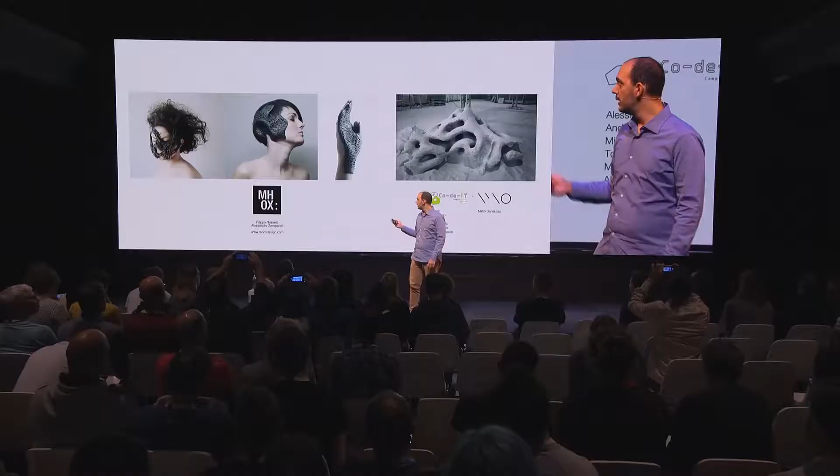I studied building engineering and architecture, but as you can see, my work is not really architectural. This is because I started to experiment in many different directions in order to explore the opportunities of computational design, digital tools, and programming, in order to combine it with 3D printing technology and explore new territories for product development, fashion product, and medical devices.

I think that for a computational designer, there are many reasons for moving to and start using Blender, at least as an additional tool together with other tools they usually use. One reason is, of course, mesh modeling. Blender is really good for mesh modeling. Compared to other CAD software, it can be really fast and really flexible. You have a very powerful creative suite at your disposal.

Modifiers allow you to create a non-destructive workflow. Usually a computational designer is really lazy, so they try to find an easy solution in order to achieve maximum complexity. With modifiers, you can keep your starting model really simple and then add all the rules you want to use and make something really complex out of that.

Another reason is vertex groups. In architecture, medical devices, fashion, everywhere, it's interesting to have the possibility to modulate some effect according to a weight map—having information that allows you to calibrate the effect of what you're doing, for example, with modifiers.

Another reason to use Blender is Tissue. Tissue is an add-on that I started to develop for Blender. Initially it was just a bunch of scripts that I developed in order to move as much of my workflow to Blender as possible.

I needed some features that weren't in Blender at that time, so I said, OK, I can do that, and I can share it with the community so maybe other people can do the same. In the end, we have a tool that works fine for computational design as well.

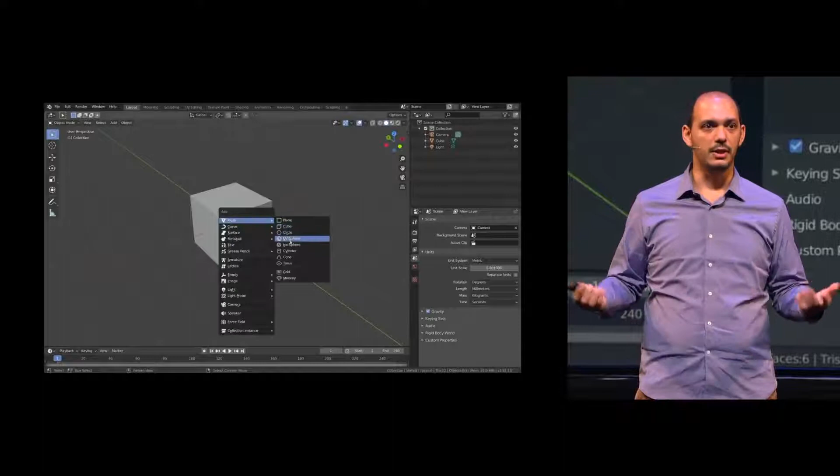Probably the most complex feature, the one that took the most time to develop, is tessellation. This is a simple example of how it works—you can literally open Blender and do these steps using Tissue. You select one object, then another, and it basically creates a copy of the first object for every face of the second one, adapting to changes in size. You have the freedom to change the source object and get an updated result.

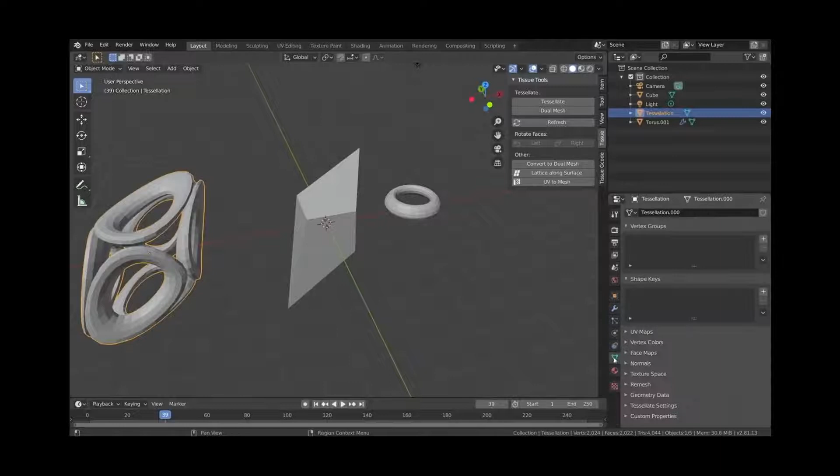It's important to work with a non-destructive workflow—I don't want to redo things again and again, and I don't want to do them manually. Since I'm really lazy, I always try to find ways to make things simple: just a few clicks, focus on the different pieces, and then assemble them when I'm ready to go further.

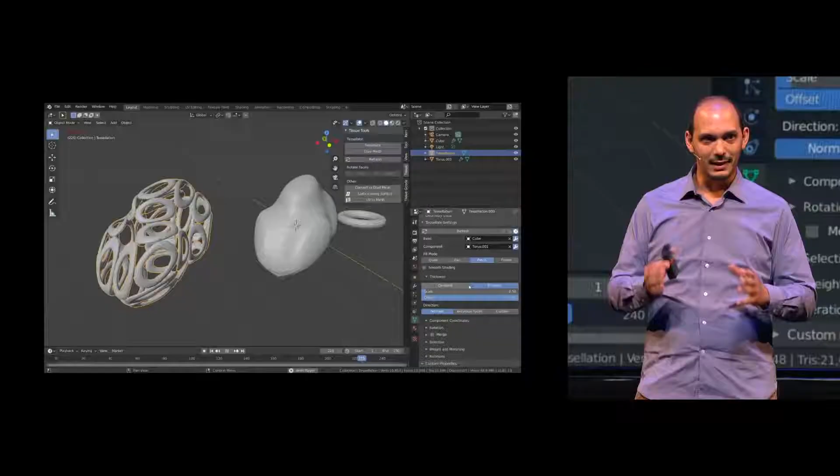There's also the possibility to animate. You can animate the source object and get an animated tessellation, or animate the parameters that control the tessellation. Unfortunately, for animation there's still some bugs that need to be fixed, but if you use the render or viewport animation in Eevee, you can still do animation using tessellation.

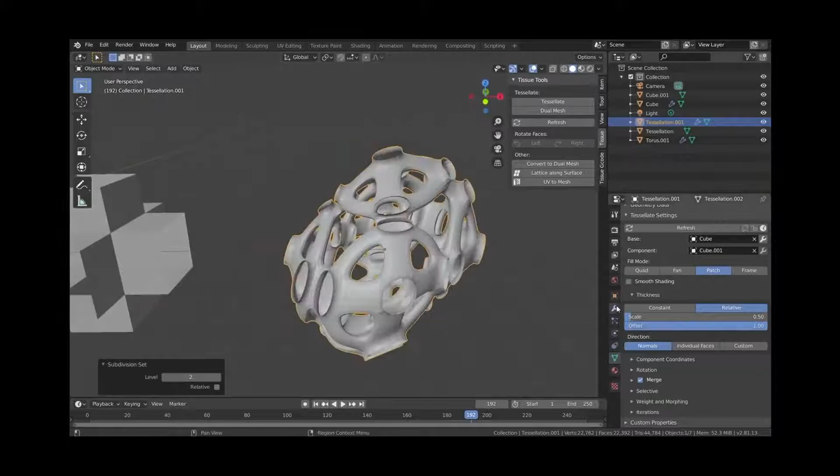For instance, with 3D printing, you usually need a very nice continuous surface. So if your component allows connectivity with neighboring components, you can create one manifold surface with some solidify modifiers and get a 3D printable object. Usually doing that in other software takes a lot of time.

And you have some settings at the beginning. If you just press OK, you can still change those settings in the object data panel. So you have a bunch of settings that you can use to control all the parameters for the tessellation. And according to the type of mesh that you have, you can use different strategies.

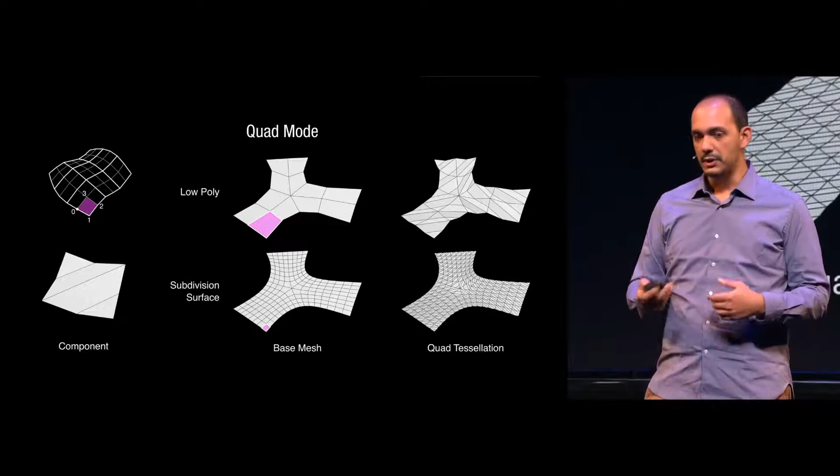The simple one, the one that you can find also easily in other software, for example, is the quad mode. It considers just the face and adapts the component to that face. But sometimes you want to make a smoother component, you want to take advantage of a subdivision surface in order to make them follow nicely the surface. So using patch mode, you can do that.

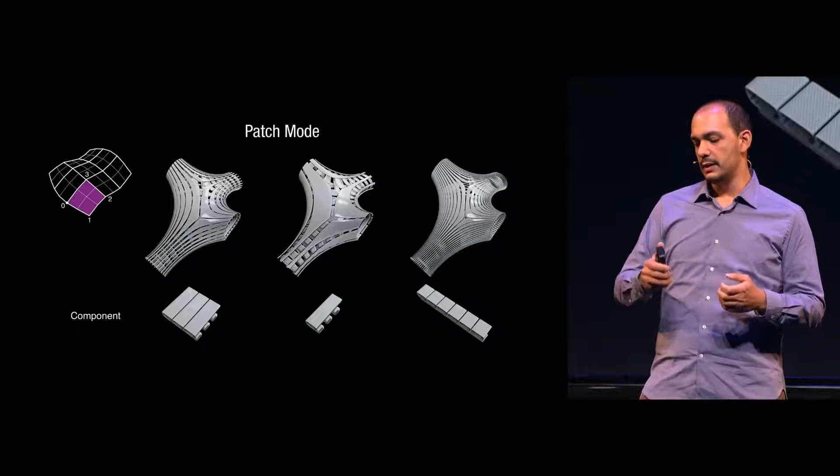So it will keep the topology before the subdivision surface or the last multi-resolution modifier. And it keeps that for defining the size of a component. Then you add a subdivision surface, and this information is used not for increasing the number of components, but for making them smoother and following the surface.

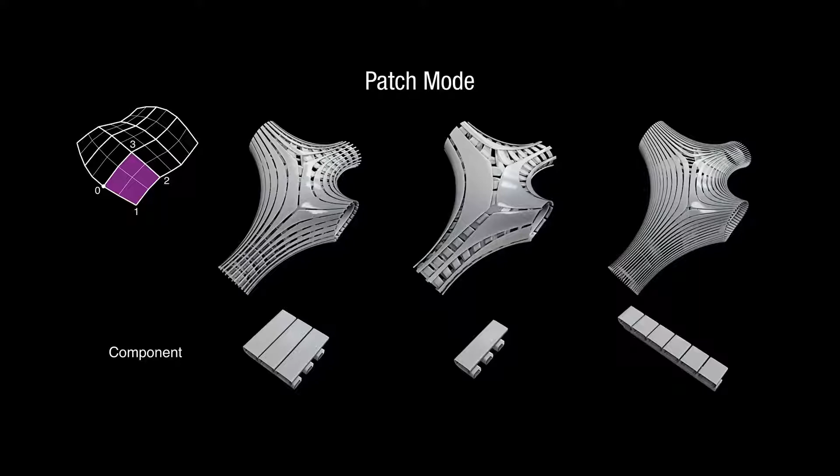And in this way, for example, you can see how you can change the number of repetitions inside the component in order to have different patterns on the surface. So the component is the same, just with some arrays in order to increase the multiplication, and that's it.

But it's more tricky to create a rule to adapt a component to a generic polygon. If you have just 4 sides, it's easy, just remapping the thing. But if you have a generic polygon, I started to think about the most simple way to do that. And what I came up with was to use like a poke faces on each polygon, and then adapt the component to each individual triangle. And doing that, you can achieve very complex geometry using very simple components.

And at some point, it's tricky to understand what you have to do in order to achieve a certain effect, but it's also interesting to be surprised by what comes out just from very simple geometries.

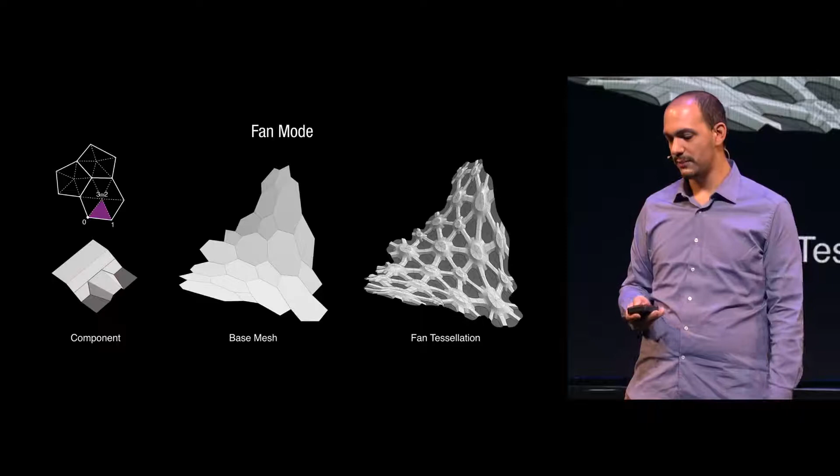And similar, but a bit different, is the frame mode. Frame mode is like a customizable version of the wireframe modifier. So you have almost the same settings of a wireframe modifier, but you can define the aspect of your wireframe, basically. So you create a component that is multiplied internally to each polygon, and then is also multiplied along the boundary.

And for all those modes, you can, of course, use some vertex groups in order to create morphing effects. So in order to program a morphing behavior, I decided to use a feature that was already in Blender. It's the shape key. And using shape keys, you can define different deformations of your component, and you can combine them with a vertex group in order to have a gradient and variation.

And basically, it makes the match just using the same name. So if the component has some shape keys that are A, B, C, D, and you have the same names for the vertex groups of the base mesh, it automatically combines them. So you can have 10 different morphing behaviors according to 10 different weight patterns.

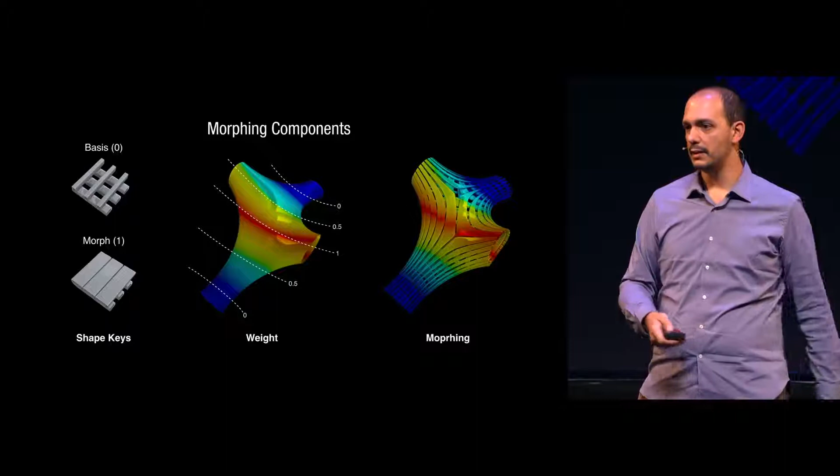And for example, I use Tissue and those features for fashion design. So this is a collaboration with a fashion designer in Italy. And for rigid objects, this is 3D printed in metal. You can easily create very complex geometry that you can produce only using 3D printing.

But for example, if you think about fashion, if you want to make garments, you can also make those patterns flat and print directly on fabric. So you just put the fabric inside your printer, you start printing those patterns that you are making with Tissue on top of the fabric, and at the end you have something flexible that you can also wear.

More complex is, for example, this project about a medical device. And the tricky part here was that, okay, I needed a tessellation because I wanted to make holes all along the surface. But I also needed different components in the different parts of the object. So I said, okay, how can I embed this feature? Let's do the same thing with matching naming, and let's use some materials on some faces, and use some objects that have the same name.

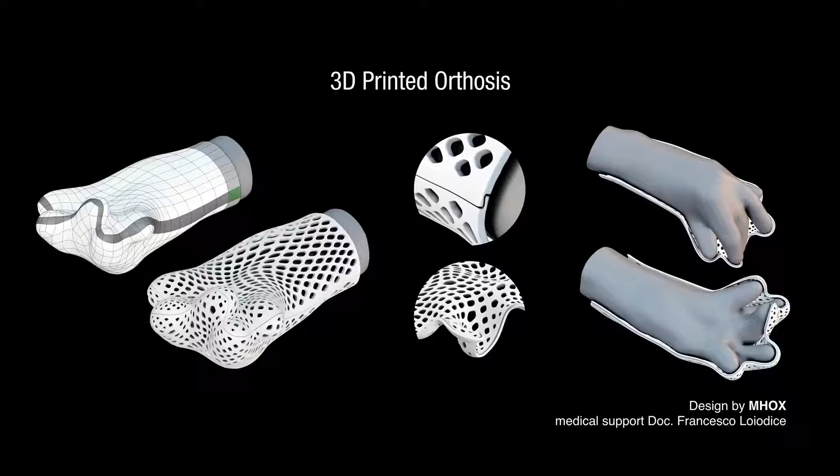So on my base surface, I have different materials, like A, B, C, and so on, and I have objects that have the same name. So when I do the tessellation, it automatically takes one component and puts it in the correct face. And doing that, I was able to use 3 different components for the starting part of a tutor, of a device, and 1 component that is morphing, changing the size for all the holes, and one other component that defines the seam, the opening, that allows to open the 2 shells.

And in that way, with 1 click, I was able to generate the tutor, the device, just working with all the pieces on 1 plate and then assemble them in 1 click.

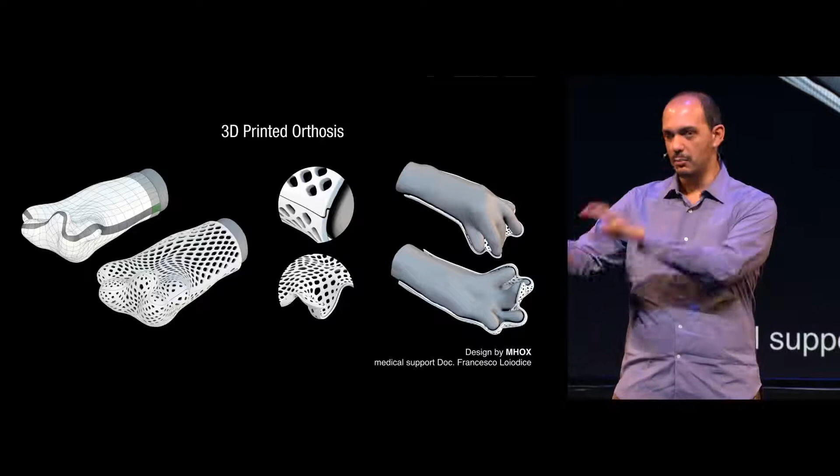This is a workshop that we did recently in Beirut. And the idea was to mix together fashion and medical devices, creating some hypothetical, futuristic medical devices. This was a 4-day workshop for people that didn't know Blender before. I think they didn't know mesh modeling in general before.

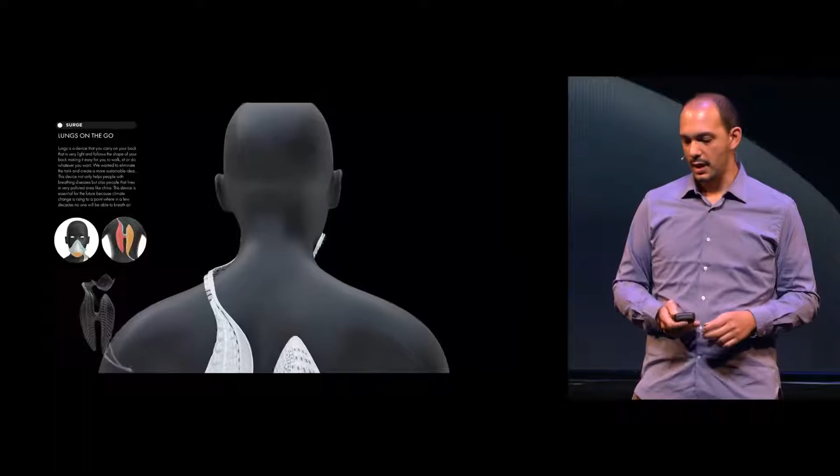And we took 2 days for training them in order to teach how to mesh model, how to use Tissue. And we took 2 days for designing. And as you can see, the models have some issues in some points, but it's interesting that they reached that result just in a 4-day workshop.

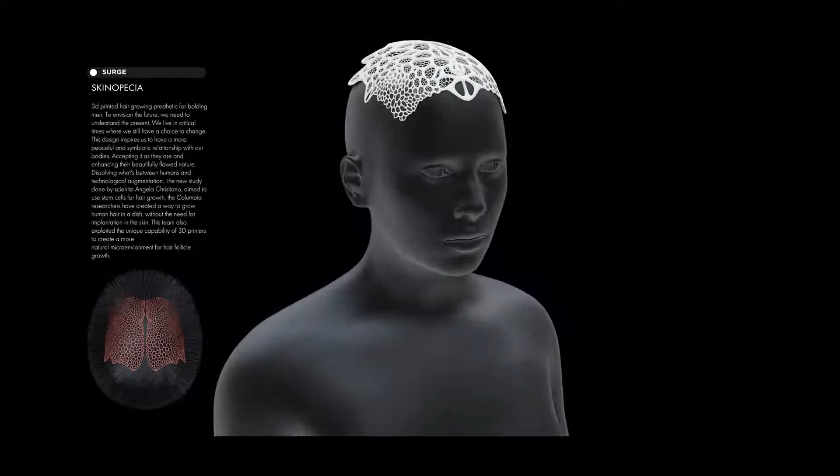I always like to use Tissue during the workshop because for me it's a way to get feedback. So I can see what part of the add-on is not working, what part is more difficult to understand. I can understand how to fix some problems. Usually some bugs come out during the workshop, so I have to fix them during the night without sleeping, and the day after, usually they are fixed. So it's a stress test for the add-on, and I really like that.

Probably you are familiar with different strategies, for example, to apply texture. So you know that you can, for example, use coordinates that are adapted to the size of the object and aligned to the object. So usually, by default, the tessellation considers the bounding box of a component and automatically adapts that to all the faces. But you can also use coordinates according to the local coordinates. So you can consider the position of the origin, or you can keep it independent using the global coordinates.

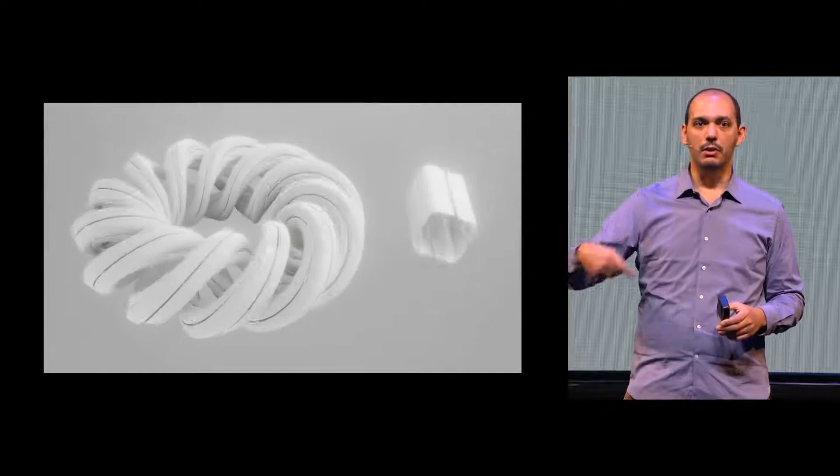And the nice thing is that in this case, the way the component is mapped on the faces is independent of the rotation and the scale. So this allows, for example, to just move, rotate, and scale the component, and automatically the tessellation creates these weird effects. And you don't need to program, you just need to click, click, and that's it.

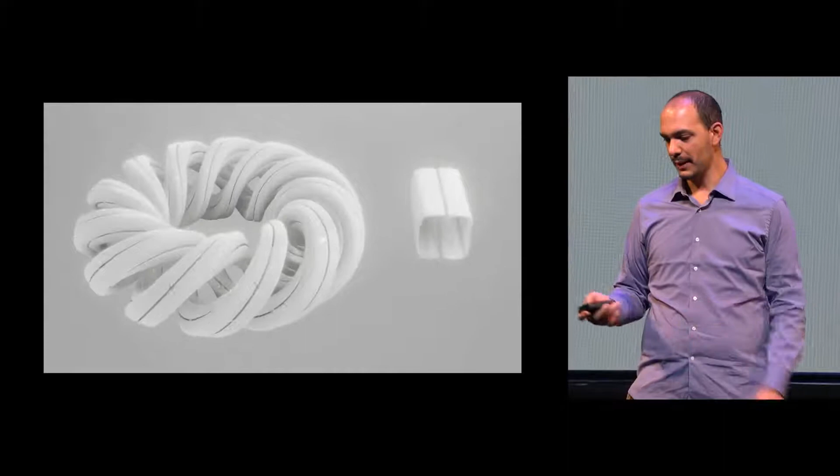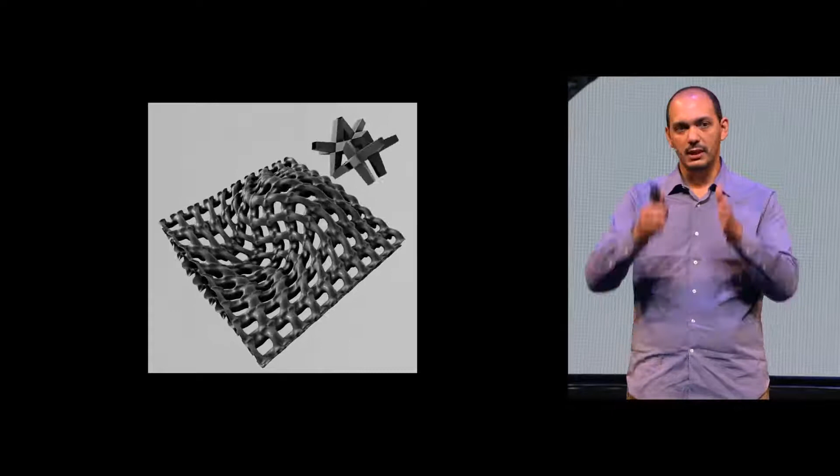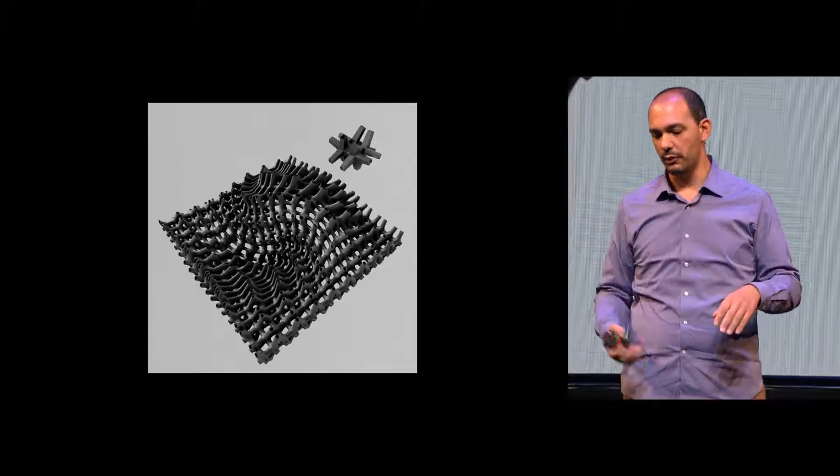Or, for instance, in this case, I use a component with a couple of mirrors in order to allow the repeatability in the 2 directions. And then I use another option that is clipping. So everything that goes out of the boundary is cut away, and this allows the connectivity between the pieces. So this object that has a very unpredictable topology actually is 3D printable because there is continuity between all the pieces. Of course, I'm using the Solidify at the end that makes the trick.

But more interesting is the cyclic coordinates option. To simplify, we can say that it is the Pac-Man effect. Basically, if some part of the object goes out of the boundary, you trim it and you move it to the other side in order to have a continuous interlocking behavior between all the components.

And this is a feature that I developed specifically for this workshop in Dubai. This was the visiting school of the Architectural Association this year. And the idea was to work with additive stereotomies. So studying the behavior of components that are 3D printed but must collaborate with a specific structural behavior in order to make a self-standing pavilion. So with my unit, that we call the Blender unit, we started to use Blender for all the aspects of the project.

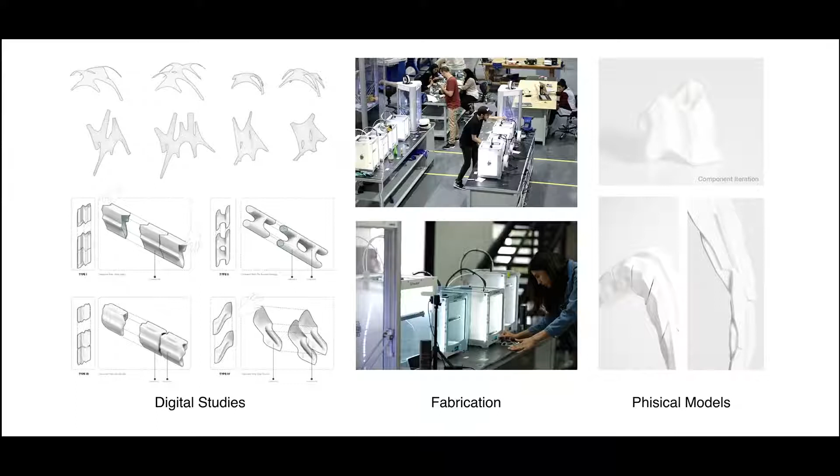And we started to use the cloth simulation in order to study the catenary system in order to make this vault that was structurally efficient. And after defining and studying the general shape, we focused on defining some components. Those components should have some features like interlocking behavior in order to make them structurally meaningful. And we printed them, using a lot of printers, in order to test the physical behavior of those components.

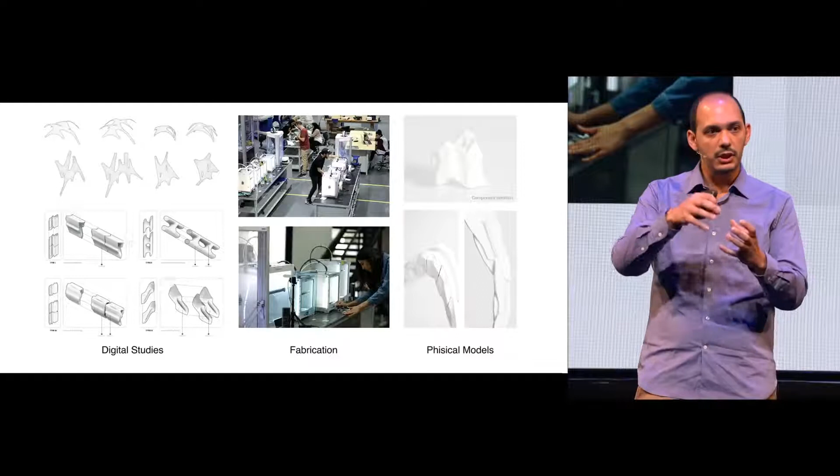When you have to fabricate things, you cannot cheat. You have to test them, and if they don't work, you have to change something. And at the end, we assembled this model, this size, without the use of any glue. So they just used some strings all along the loops, and everything just works because of the interlocking interface between all the pieces.

Also, because computational designers, and me in particular, are lazy, I try to find the simplest way to get the maximum complexity out of the simplest component possible. So in this case, the component is a plane. I just took two vertices and I lifted them a little bit up. The base object is a triangle. And if you use the fan tessellation, what you get is a kind of pyramid. You have all the planes that converge to the center.

So if you take the same component and do the same tessellation on top of that pyramid, what you get is the second iteration. And doing the same thing again, you can increase the number of iterations, creating basically a kind of fractal. So I decided to put just a repeat parameter in order to automatically propagate the effect of the tessellation, in order to see what happens after some number of iterations.

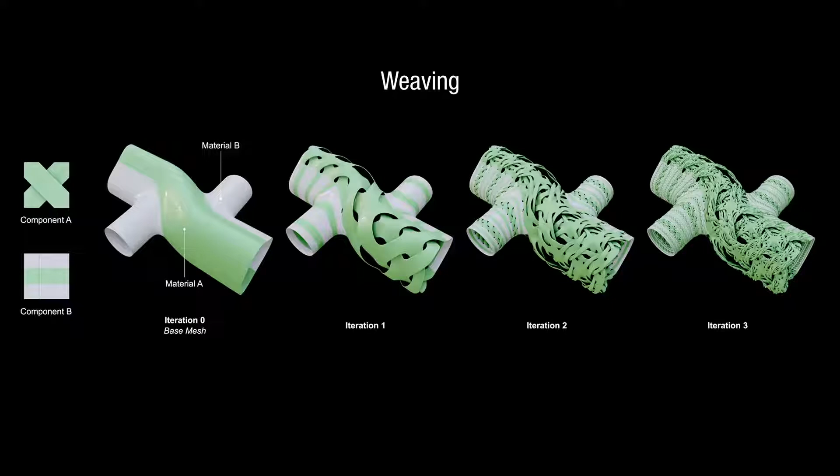And it's nice because you can really get unpredictable results with just small changes in the component. And things are even more complex if you combine that with the multi-component feature. So this is a bit complicated. So the component A, the X, goes on the green material. The component B, the one with the stripes, goes to the white. But after the first iteration, because the component B has both materials, it can trigger the generation of both components.

So you see how increasing the iterations, you can get this pattern that you cannot really predict at the beginning. So you just have to iterate all of them and see what happens. And just working with very simple components, you get something that is extremely complex at the end. And yeah, it's something that I'm still experimenting with, so it's interesting to play: just changing how you assign the materials to the component B completely changes the effect that you get at the end.

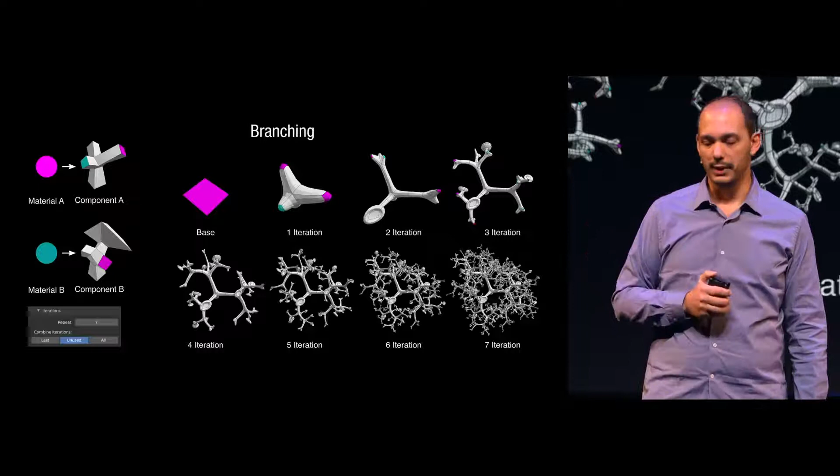Or, even more complex, if you, for example, use as a component a branching like this, and you have different materials on the end part of each branch, those can generate different branches using iteration. In this case, the difference is that there is an unused option that allows you to keep all the faces that don't generate the branches. So instead of replacing the tessellation like we did before, you are making it grow.

So, for example, you can make a component that has a kind of flower, I don't know, and you can combine them, and at some point with those rules, you can change completely the final result. And if you combine, for example, this feature with the shape keys of a single branch, you can get this animated broccoli.

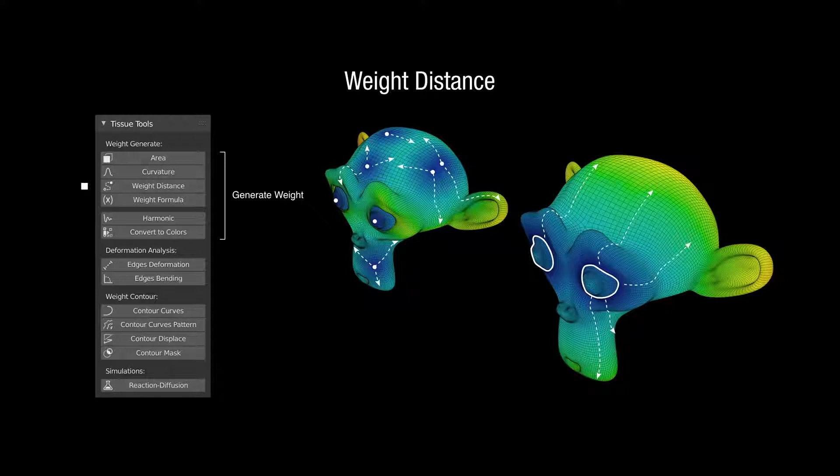Weight tools. Because I really love vertex groups and weight paint, and they are really useful for computational designers, I decided to add some features to them in order to use them in my workflow. So some of them are really simple, like the size of the faces, the curvature, that is actually based on the dirty vertex colors feature. But some others are a bit more complex, like, for example, the weight distance, that doesn't consider the distance from some vertices along a straight line, but computes the distance following the curvature of the surface. Why we should do that, we will see later.

Or weight formula. Sometimes you need some mathematical formulas to apply to your vertex group. With weight formula, you can do that. You have some variables that you can use, for example, the x, y, and z coordinates. You can use the normal coordinates of each vertex. You can use other vertex groups as variables, so you can process other vertex groups. Or you can use some keywords in order to insert some sliders and play with the numbers in order to see how each variable changes the effect.

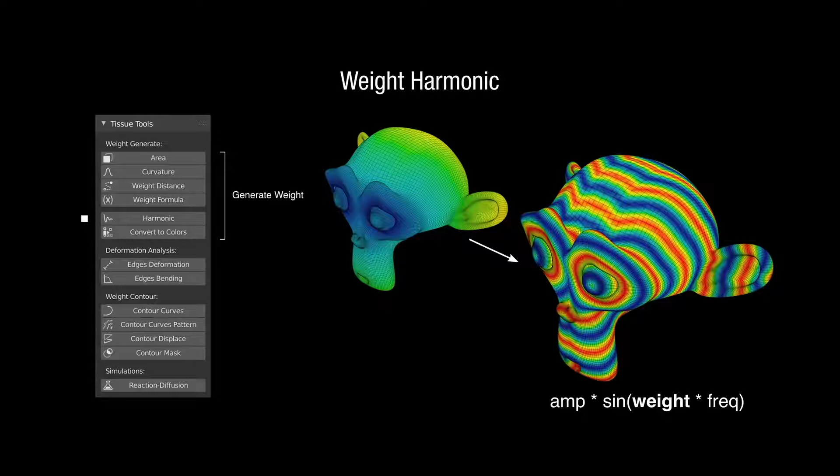Or, for example, you can use weight harmonic, which is just a harmonic function of a vertex group. And the effect is similar to the wood texture, but is controlled by a source vertex group. Or you can convert to color if you want to render them, or if you want, for example, to export this information to another software. Because the vertex group, you cannot export it, but if you convert to vertex color, you can export and use that information also in other software.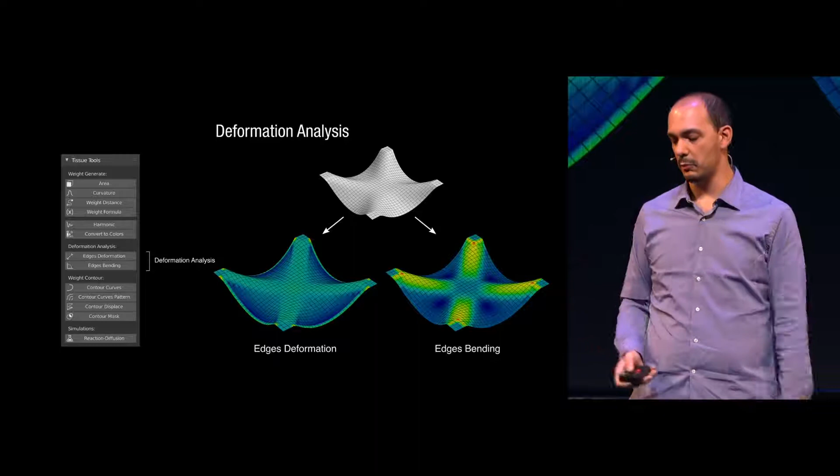Or because we work with cloth behavior in order to study the catenary system, I wanted to have some information about the physical behavior of the cloth. So I try to read the information of the deformation, making some weight maps. My favorites are the contour tools. So if you have a vertex group, you can generate on the surface all the curves that follow the same value. So you can define a starting value, an end value, and in the middle you can put all the curves that you want.

Or, for example, if you have ever tried to make a displace pattern with a very sharp element, but your topology is aligned in a completely different way, you need to increase the number of subdivisions a lot in order to have this sharpness in your displace. So with contour displace, it reads the vertex group and adds some edges following the direction of the vertex group. So this allows you to keep a lower number of faces, but have more sharpness in your displace map. And yeah, you see a couple of examples.

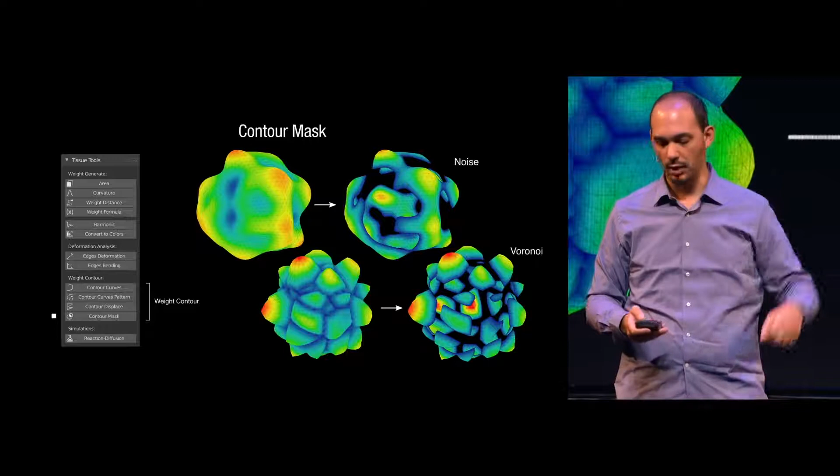Or the same thing with a mask. So instead of just deleting the vertices like the mask modifier that we have in Blender, you can cut the mesh and remove half of it in order to have this continuous and nice cut along the geometry. Or this is an experiment that I did, and I tried to implement the reaction diffusion simulation using the vertex group.

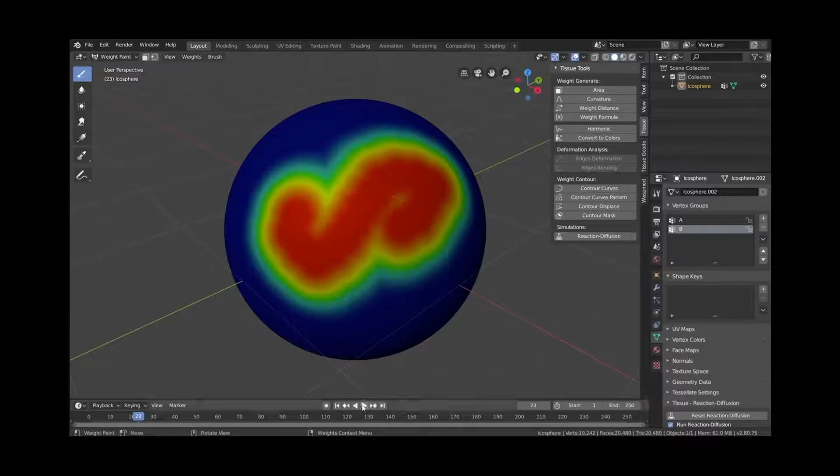So the reaction diffusion is based on the theory of Alan Turing about the generation of a pattern on animal skin. So he understood at that time that there was a chemical reaction behind the pattern that you see on fishes, animals, and everything. And basically, there are two different substances. One is called A, and the other one B. A lot of fantasy. And you can make them diffuse along the surface and make them react when they are in contact with each other.

So you can just paint and see how the reaction works in real time. In order to make it not super slow, I had to use Numba. I don't know if you're familiar with Python and the Numba library. It was the fastest way that I was able to implement using an add-on. Probably hard coding in the source code of Blender could make much more sense. But yeah, it was the easiest way that I found at the time.

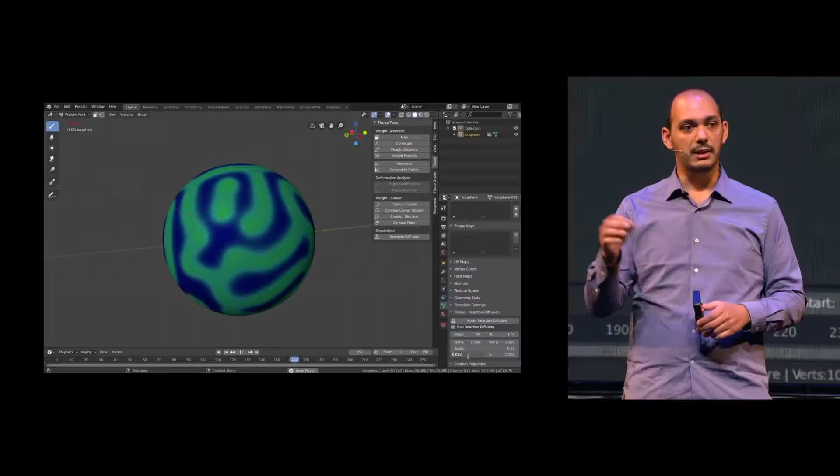And changing the parameters, you can change the effect of the pattern, and you can see different possible patterns, some spot patterns, some labyrinthic patterns, some more unstable and unpredictable patterns, like this one, for example, that is constantly changing. And you can combine that, of course, with modifiers. So, for example, if we add just a displace modifier, you can, in real time, start painting and see what happens.

Yeah. OK. If you are trypophobic, close your eyes. If you are scared of holes and small things, because this is an implementation of reaction diffusion using just some modifiers. So the edge split, the smooth, the displace, and the wireframe.

G-code exporter. This is the last piece. I'm not sure if I'm going to keep it inside Tissue, or maybe I will make another one, because it's more technical, related to 3D printing. Indeed, the G-code is all the blah, blah, blah that you usually put in the printer in order to print something. It contains all the information of the toolpath in order to see how the printer should move in order to fabricate a certain object.

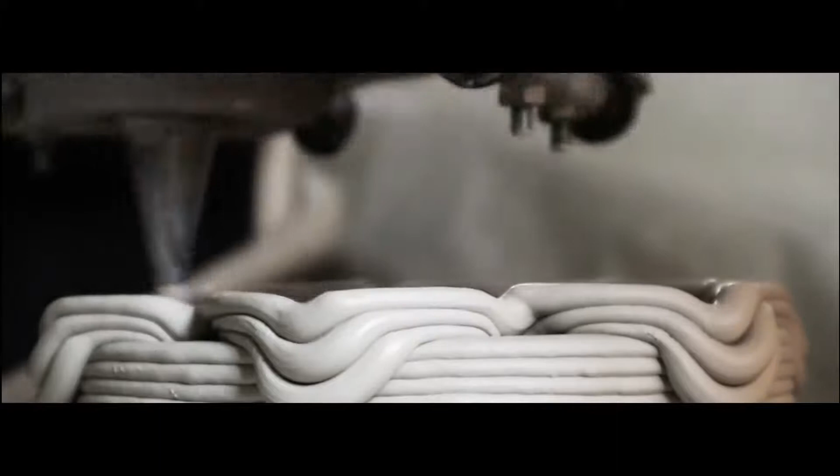So why should we do that? Isn't it more complicated to get something nice just working with the curves rather than making just a 3D model? Yes, of course, but sometimes, with some technology, it's interesting to actually play with a path. Because if you make something weird, sometimes you get some effect, some error, but if you understand how to control them, you can use them as features in your design. So the idea is avoiding the 3D modeling of the surface of the final object and just working on the path that you are using.

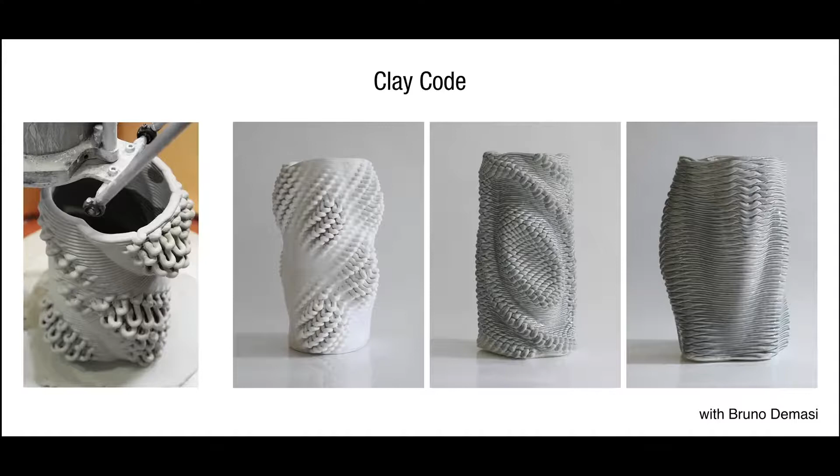So together with Bruno Demasi, one of my collaborators, we made those vases using this approach to 3D printing. In this case, we used Sverchok. I think you probably know Sverchok. It's an add-on that allows you to create mathematical rules using a composition of nodes. But now we are experimenting with a different workflow just using Tissue.

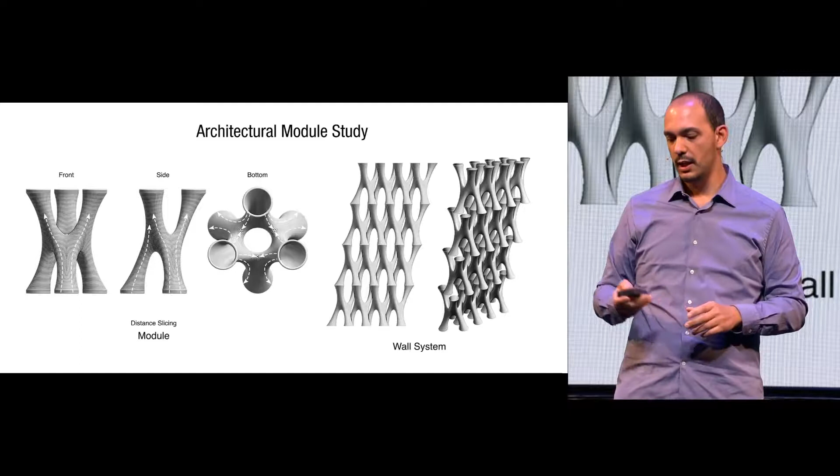We are now experimenting with some architectural modules in order to make the slicing behavior more adapted to the particular shape that we are making. And we are still printing some of them. So this wall kind of looks like Tissue. I mean, it's a work in progress, continuous work in progress, many pieces that have to be connected together.